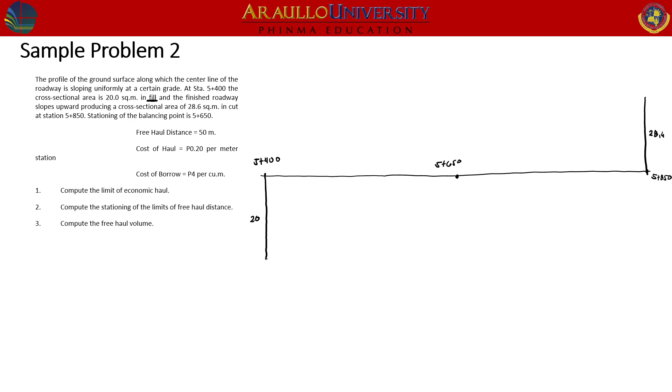Okay? Ano pa yung sinabi ng problem? Sa station naman na 5+850, so dito, assuming na ito yung 5+850, meron naman daw tayong cut na 28.6. So ito, 28.6. And then our balancing point, kung saan 0, balance, is nasa station 5+650. Okay? So balance tayo dito. This will be our first portion, the fill. At ito naman yung ating cut. Okay? Again, this is your fill and this is your cut.

So, ang free haul distance daw natin is 50 meters lang. So, i-assume muna natin yung pwesto ng ating free haul. Lalagyan ko ulit ng red. I-shade na lang natin ng red. Okay? So, assuming nasa fill, ito yung free haul volume ko. Sa cut, ito yung free haul volume ko. And then the distance daw between these two portions of our roadway is 50 meters. Ito yung 50 meters na tinutukoy na free haul distance. If this is 50 meters, therefore ito would be x at ito naman is magiging 50 minus x. Okay?

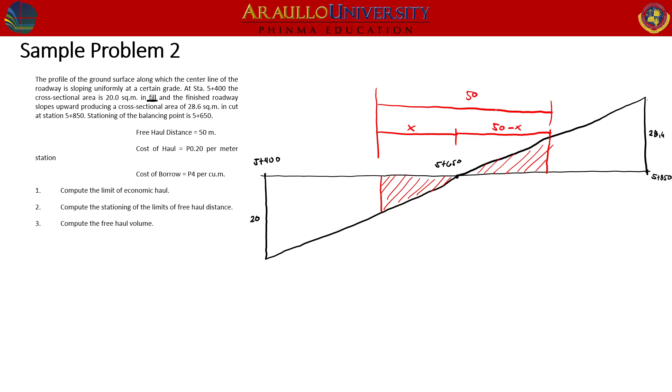So, limit of economic haul naman tayo. So, ito mag-a-assume muna ulit ako. Palitan natin ng kulay, gawin nating light blue. So, ito naman yung aking overhaul volume para sa limit of economic haul. Okay? So, sa kabilang side, ito yan. So, ito po ngayon yung tinatawag nating LEH, or the limit of economic haul. And then, itong natitira would be the volume of waste.

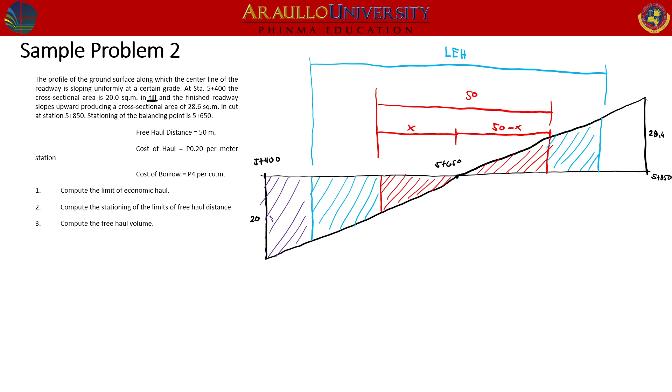Ito po yung waste. Ay sorry, baliktad po pala. Since fill ito, borrow po ito. Tambak, hihiram tayo ng tambak. And then ito naman po yung ating waste. Since sobra, itatapon po natin. Waste. Okay? And then ito yung ating overhaul. Ito naman yung ating free haul. So, likewise dito, ito din yung free haul, at ito rin po yung overhaul. Okay? So, puntahan natin yung dimensionings.

Okay. Then we have here the total length. Masyadong mababa. Kumpitin muna natin yung kabuuang haba. So, 5,650 minus 5,400, you have here 250. And then, on the other side, 5,850 minus 5,650, you have here 200. So, hindi pantay, ha? Okay?

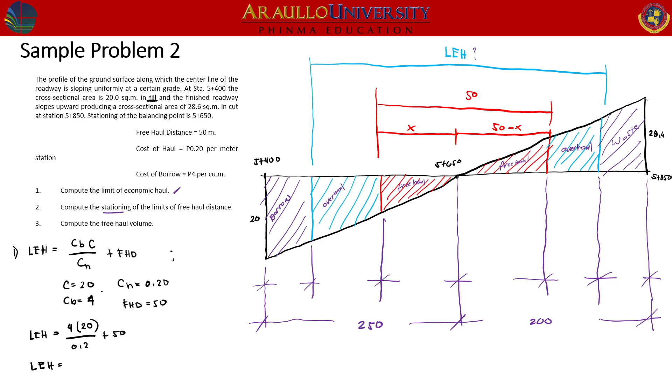Yung 20 meter station, kung bakit laging 20 meters yung ina-assume dito is because every time po na nagle-layout tayo ng mga kalsada, curves, or parabolic curves, 20 meters po talaga yung nagiging hati ng ating mga kalsada, 20 meter station. Okay? So, laging 20 meters kapag hindi provided. Okay? So, the limit of our economic haul is 450.

Therefore, this is 450. So, right now, hindi pa rin natin masosolve. We still have to solve for the value of x. Okay? So, kaya naman natin yan. So, on the next slide, solvein natin yan using some properties. Paano? Okay? So, we can use the relationship of these two. The volume of this, since freehaul yung pinag-uusapan, yung volume nito equal sa volume nito.

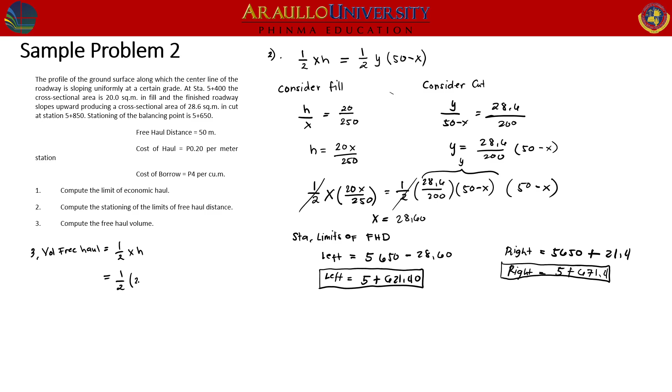And then, the freehaul volume na tinatanong for number 3, yung volume ng freehaul is equivalent to, kahit alin dyan, equal naman po yan, 1/2 ng x times h. Okay? So, kunin natin, 1/2 ng x, our x is 28.6 multiplied by h. Ang h natin is 20 over 250 times 28.6. Okay? Therefore, our freehaul volume is 1/2 ng 28.6 times 20 over 250 times 28.6. You have here 32.7184 cubic meter. Okay?

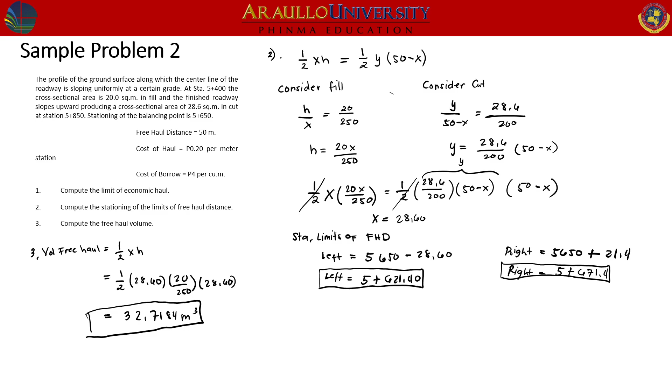So, tapos na po tayo. Pwede nyo pong itry na isolve yung overhaul, the volume of borrow, and then the volume of waste. Paano? Since meron ka ng length nito, pwede ka na rin actually mag-similar triangle. Pwede mo nang kunin ito. Okay? Yung volume nito equal sa volume nito. Paano mo kukunin yung volume nito? If this is A and this is B. Okay? So, yung volume nito is 1/2 ng A plus B multiplied by, kung ang length mo dito ay Z1 at ito ay Z2, multiplied by Z1.

Okay? So, kunin mo na lang si H, si A. Okay? Makukuha mo naman yan kasi pwede mong kunin ito as this one. Since meron ka na 450 minus, sabihin mong may X na kasi tayo eh. So, W na lang yung width. And then, ito naman yung W mo. Kunin mo muna yung W. Kunin mo si A in terms of W. Okay, makukuha mo na to. Alright, so that would be all for our earthworks.